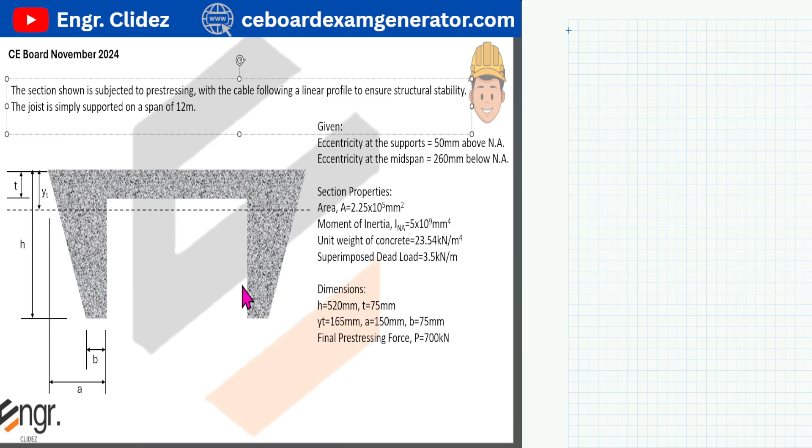Yung section shown daw is subjected to pre-stressing with the cable following a linear profile to ensure structural stability. The joist is simply supported on a span of 12 meters. Now, ito yung keyword. Yung cable daw follows a linear profile. So, ibig sabihin, hindi pala horizontal yung profile ng tendons natin.

Usually kasi sa mga lumabas na board exam from 2010, yung ina-assume kasi na profile ng tendons is simply horizontal. Sabihin natin, ito yung neutral axis. Yung profile ng tendon, ina-assume na perfectly horizontal. So, ano yung implication? Yung implication is, yung eccentricity is constant all throughout. From the support going to the other end, same lang yung value ng E. Constant siya. Kaya yung ginagamit na E hindi siya magbabago. Depende na lang sa kung ano yung given na eccentricity.

However, dito sa problem, it's explicitly stated na linear profile wherein yung eccentricity sa support is 50 mm above the neutral axis, but doon naman sa midspan, 260 mm below the neutral axis. So, mag-iiba pala yung eccentricity as we move along the span. So, hindi lang isa yung value ng eccentricity. We have to solve the specific eccentricity at a point if hindi sa support or midspan yung tinatanong. If nasa support or midspan, then we can readily use the given. But mamaya may isosolve tayo na hindi naman sa midspan.

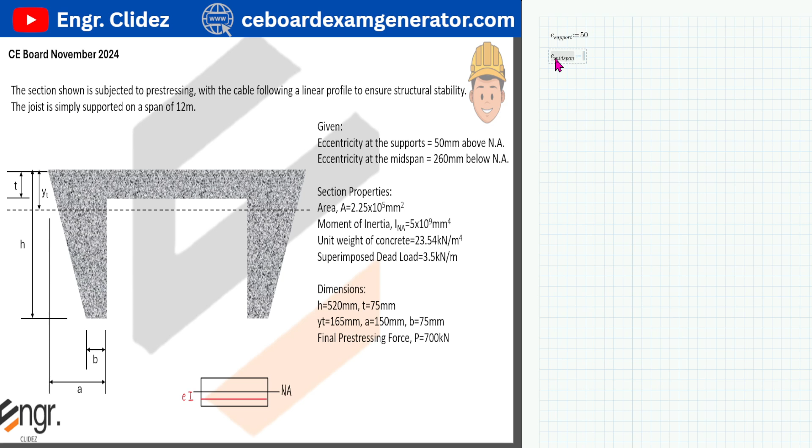So, yung gagawin natin first, sulat natin yung mga given. Yung eccentricity sa support is equal to 50, lagyan na lang natin ng E support. Yung eccentricity naman sa midspan is equal to 260. Then, yung area natin, 2.25 times 10 to the power of 5. Then, our moment of inertia about the x-axis, the axis of bending, is equal to 5 times 10 to the 9. Then, also given yung unit weight ng concrete, we have here 23.54.

Now, meron ding superimposed dead load. Kapag sinabing superimposed dead load, hindi pa yan including self-weight. So, whatever this value is, i-add pa natin yung due to self-weight, yung W due to self-weight, if we are to solve at service conditions. So, yung superimposed, lagyan ko na lang ng WSDL.

We have 3.5. Then, for our dimensions, we have H is equal to 520. Yung thickness naman dito sa top, although hindi na natin yan kailangan sa problem natin, we have 75. Then, yung Y from the top is 165, ito yung location ng centroid. Then, A is 150, B naman is 75. Then, we have a final pre-stressing force equal to 700, label natin yan as P, 700 kilonewtons. So again, ito yung profile ng mga previous na lumabas sa board exam.

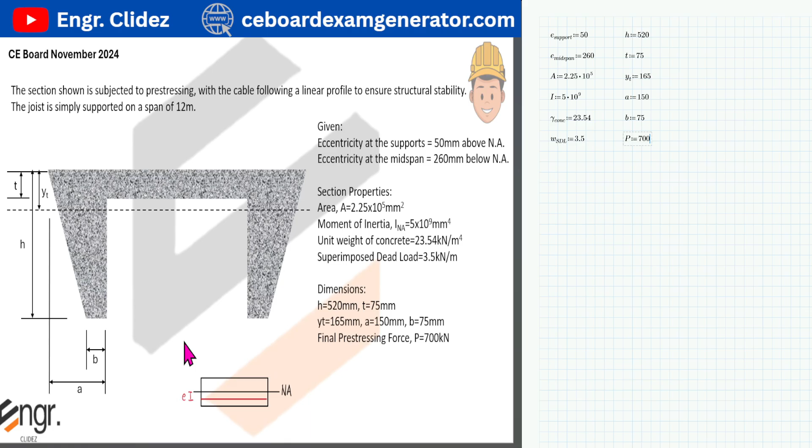But we will not be using this sa problem na to, remove ko na lang. Now, for our first question, we have to compute the stress at the top fiber near the support due to pre-stress alone. Ayan, sinabi dyan near the support. So we can use the eccentricity which is equal to 50. Now, explain ko muna yung profile.

Yung beam natin is simply supported. So, sabihin natin, ito yan. Di ba alam natin na yung height is equal to 520. Ito yan, ito yung side view ng beam, 520 mm. Then, our neutral axis is 165 mm from the top. Ito yan, 165. Ito yung neutral axis. So, at the support daw, yung eccentricity is equal to 50 mm, and again, above the neutral axis. So, andito yan, somewhere dyan, yung eccentricity natin.

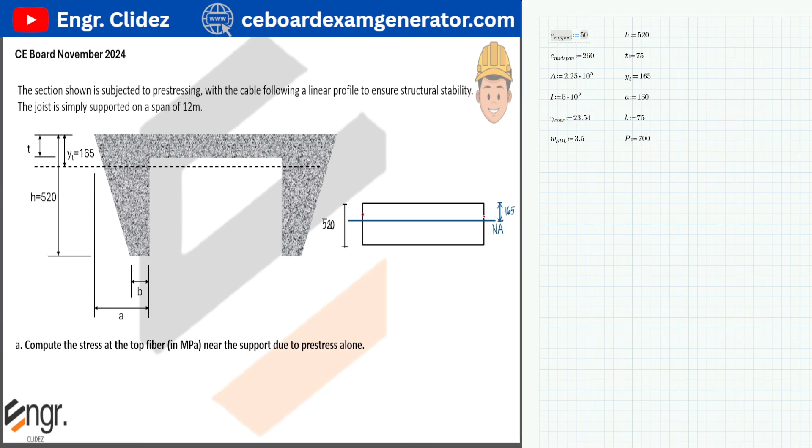Now, doon din sa kabila, since dito naman yung roller support natin. Assume ko na lang na andito yung hinge, tas ito naman yung roller support. So, dito rin sa kabila, 50 mm above the neutral axis. Now, sa midspan naman, dito sa gitna, yung eccentricity niya is 260 mm below the neutral axis. So, probably nandito. Ayan. Now, bakit ganito yung profile? Ganito yung naging profile natin kasi di ba kapag dinraw natin yung moment diagram ng simply supported span tapos merong uniform load over the whole span, yung maximum moment will occur sa gitna.

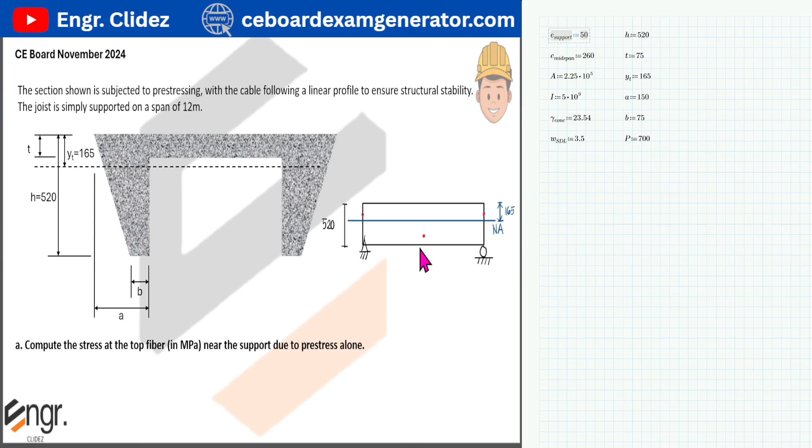At the midspan, the eccentricity must be large to offset the tensile stresses, since concrete is weak in tension. At the supports, the eccentricity is above the neutral axis because adding the prestressing force there causes a compressive stress. Applying the prestressing force above the neutral axis ensures that due to prestress, the stress at the supports becomes zero, or close to zero, not necessarily exactly zero.

So let's connect this to the midspan, and this too - that will be our profile. In order to solve the eccentricity at a point, for example if I want to compute the stresses at this particular point, I have to solve this eccentricity by ratio and proportion.

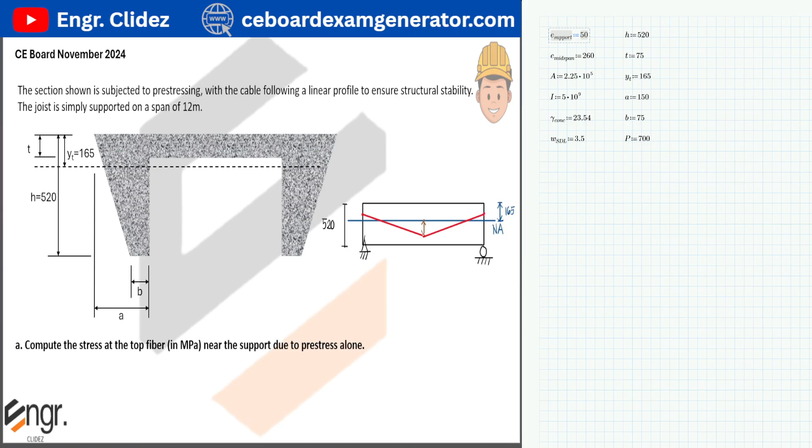Let's place the distances we need. This one is equal to 260. Then at the supports, this will be 50mm above the neutral axis. Now let's analyze.

For the stress at the top fiber near the support, due to prestress alone, let's check what the bending stress caused by prestress will be. For this first problem, I'll copy it for our succeeding questions. Since near the support is what's being asked, our prestressing force will be applied 50mm above the neutral axis as well, at both ends.

So what happens there - if the eccentricity is above the neutral axis, what will be the bending of the beam? Let's check. If we look at the left end and take moments about the neutral axis, what moment will this force cause? When we take the moment there at the center, this will cause a clockwise rotation. So due to prestress, we have this figure.

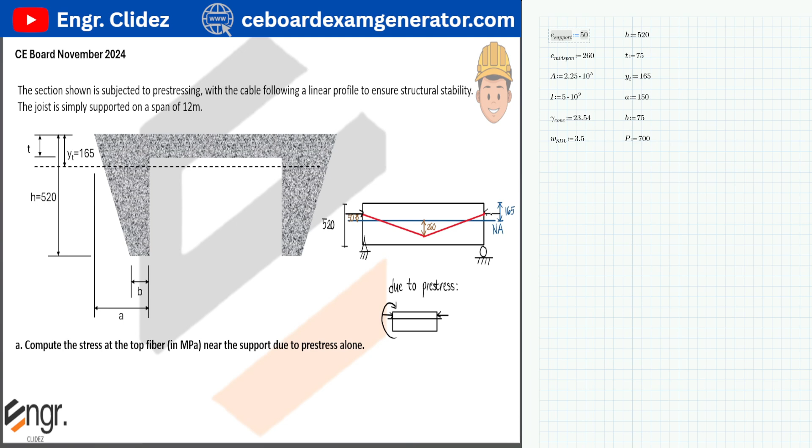This is the neutral axis, then we applied the eccentricity above it. So the moment there, again at the left end, we have clockwise. Then at the right end, when we take moments about the neutral axis, we have a counterclockwise rotation when we apply this - counterclockwise will be in this direction.

Now when you apply those moments at both ends, what happens is you get positive bending - this is how the beam bends. So when the beam bends like that, the arc that becomes shorter is the top one. So this is compression, and this one becomes longer - this is tension. So at the top fiber, due to prestress, it is actually in compression.

Now, due to prestress alone is what's being asked. So the combined stresses - normal stress, force over area, then plus the bending stress, which on the top side is in compression. So we have here: the stress at the top is equal to - using our own sign convention so it doesn't conflict with our convention in statics - negative for compression, positive for tension. The prestressing force is always acting toward the cross-section, so it's always compressive: minus P over A.

Then due to prestress we have compression at the top, so minus as well: MC over I, bending stress. But what is M? The moment is just the force multiplied by the perpendicular distance. Now this is P, our prestressing force, and this is the eccentricity. So M is equal to P multiplied by the eccentricity - that's why in many books, they use PEC over I. But the C we'll use, since it's the top fiber, is the distance from the top going to the neutral axis - that's Y top.

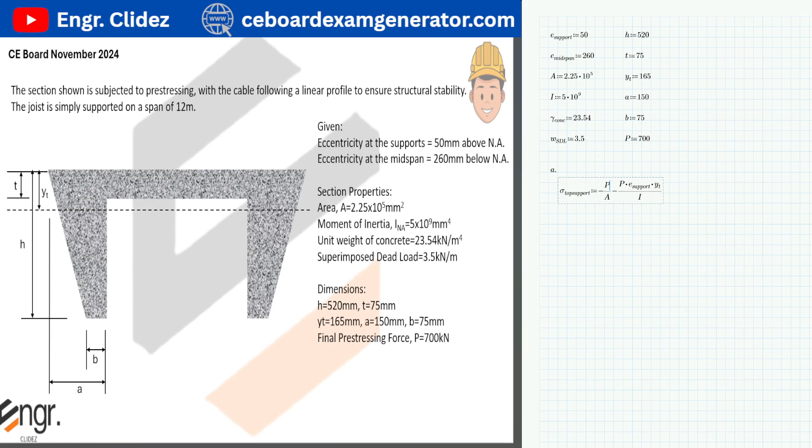Now our P is in kilonewtons - the prestressing force is in kilonewtons, so we have to convert it into Newtons to get the resulting stress in megapascals, since the problem specifies MPa. For A, no problem since it's already in mm squared. Now here, P is still in kN, so multiply this by 1,000 to convert to Newtons. So stress equals minus 4.266. Our resulting sign is negative, meaning it's in compression - so the stress at the top is equal to 4.27 megapascal, in compression.

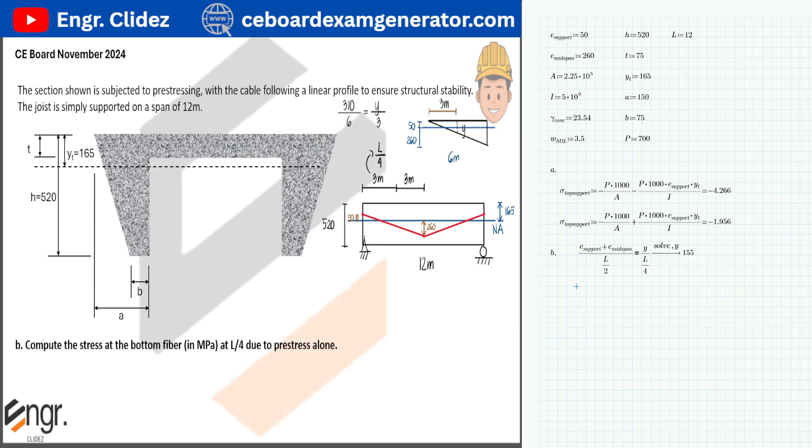So solving for y, we have 155. That's half of 310. But that's not yet the eccentricity, because 155 is the total height. Our eccentricity is just the distance going to the neutral axis, which is this distance here. So for the eccentricity, let's set eccentricity equals y minus 50, where 50 is this value, and y is the total height minus 50. So let's store that as y.

Then the eccentricity at L over 4, or simply 0.25L, is equal to y minus the support value. So how did we know that the eccentricity is below the neutral axis? The value we got is 155 for the total height, which is greater than 50, so that's why it's below the neutral axis. If it's not greater than 50, then the eccentricity is above the neutral axis, but then you still need to subtract - if it's lesser than 50, it becomes 50 minus the value you got.

For example, the point you're analyzing is here, so you can solve this height. The eccentricity toward the neutral axis will be 50 minus this distance. It's like that. However, if you want to be sure right away, you can use linear interpolation.

So this is what we'll do. Just input the necessary values here. Go to mode, then linear. If it's a linear profile, choose linear; if parabolic, choose quadratic. So here we go to stat 3, then linear 2. Then we input values for x and y. We only need 2 points, but for quadratic interpolation we need 3 points.

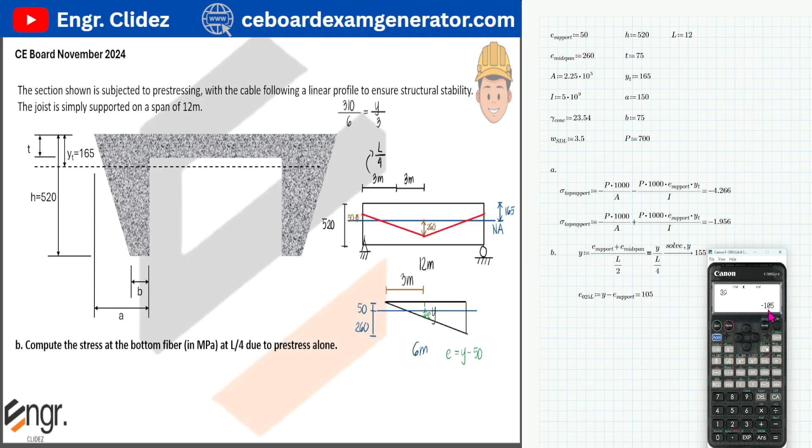That's negative since it's below the neutral axis. This matches what we got before - 105, below the neutral axis. So if you want to use interpolation, you may do so. Let me just input our values here - below the neutral axis. Then for our data, this is what we input - by interpolation. So let's go back to our problem.

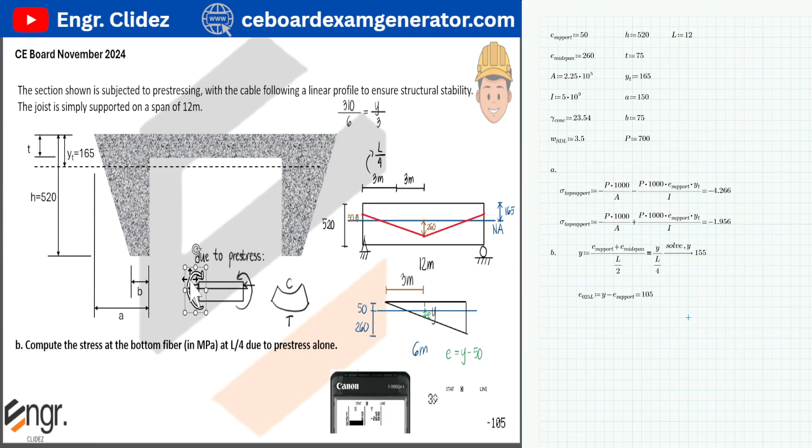The eccentricity is below the neutral axis, so what happens to the bending due to pre-stress? Let me copy this. The orientation changes for this particular point - instead of above the neutral axis, the pre-stressing force is now applied below the neutral axis. So when it's below the neutral axis, here it is - what would happen? When I take moment about the neutral axis, at the left end, this force will cause a counterclockwise rotation about the neutral axis, while this one will cause a clockwise rotation about the neutral axis.

So this is the direction. Now when I apply that to the beam, I have counterclockwise here and clockwise there. The resulting bending is negative bending when it's like this - counterclockwise here, clockwise there. So the compression becomes the bottom fiber now, since that's the one that shortened, while the top fiber elongates, so it's in tension.

Now we want the stress at the bottom fiber, so it's in compression due to pre-stress. Therefore, for the stress at the bottom at L over 4, or 0.25L, we would have minus P over A. Actually, we can copy this.

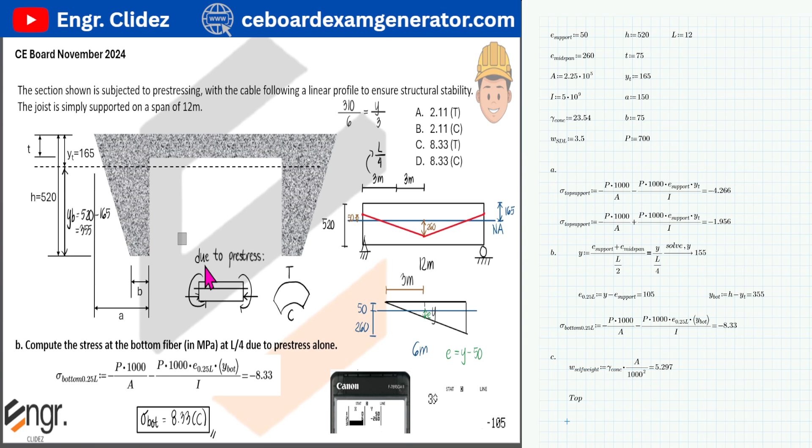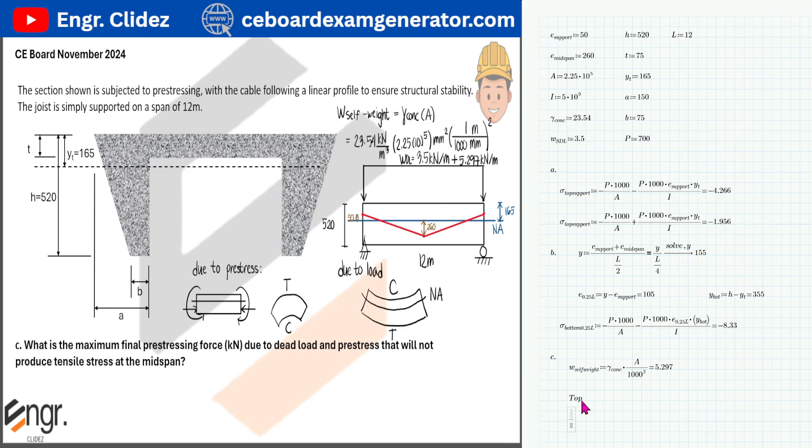So at the top, we have minus P over A. By the way, we have to clear P first. Clear P. So minus P over A. Then convert this into kilonewtons so that our resulting answer is already in kN. We leave the conversion factor. So minus P over A.

Then due to the pre-stressing force, the top is in tension, so plus PEC over I. Let's convert this into newtons first, times 1,000. The eccentricity we'll use is the eccentricity at midspan. So PE, then multiplied by C. That's the top fiber, so we have to use Y top, then divided by I. Now due to the load, we have MC over I, which is M times Y top divided by I.

So what will be the value of M? The value of M is the maximum moment at midspan. We have a formula if the uniform load is acting over the whole span, which is WL squared over 8. So let's solve for W total first, which will be W due to the superimposed dead load plus W due to self-weight. This will give us 8.797 when you add the two.

So our M at midspan is W total times L squared over 8. We have 158.337, so that's our M there. However, this is in kilonewton-meter, since it's kN per meter and our L is in meters. So we have to convert this into Newton-mm. Just multiply this by 1,000 squared, or you can also use times 10 to the power of 6. Both are the same, actually 10 to the 6 is better.